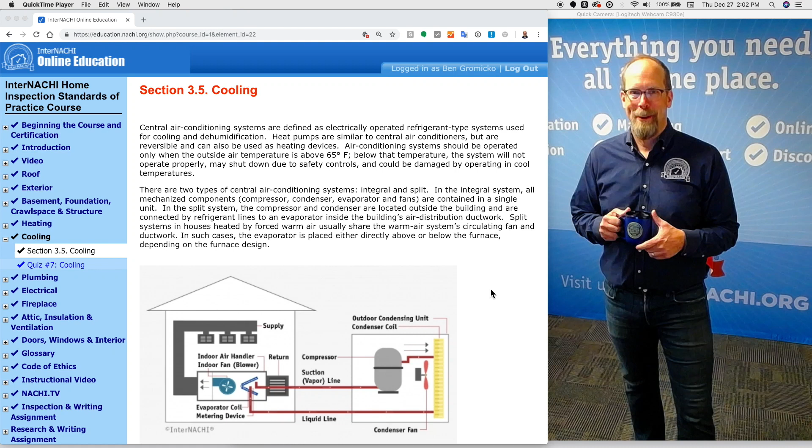We're in the cooling section of the InterNACHI Home Inspection Standards of Practice course. And this video, again, is supplemental to the course. You can play it as you go along your pages within the course.

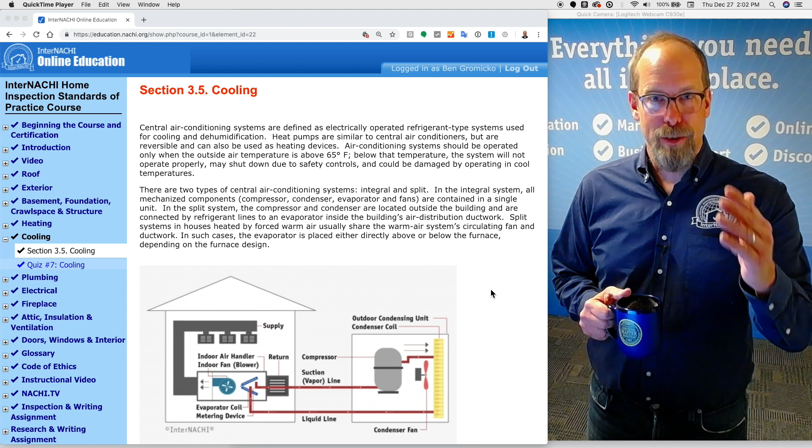Central air conditioning systems are defined as electrically operated refrigerant-type systems used for cooling and dehumidification. Heat pumps are similar to air conditioners, but are reversible and can be used as heating devices.

Air conditioning systems should be operated only when the outside temperature is above 65 degrees Fahrenheit. Below that temperature, the system may not operate properly, may shut down due to safety controls, and could be damaged by operating the unit in cool temperatures.

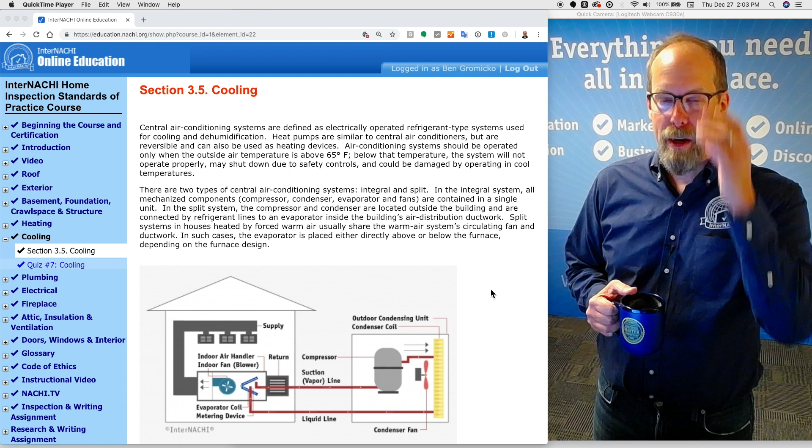There are two types of central air conditioning systems, integral and split. In the integral system, all mechanized components, compressor, condenser, evaporator, and fans, are contained in a single unit.

In the split system, the compressor and condenser are located outside the building and are connected by refrigerant lines to an evaporator coil inside the building's air distribution network, the ductwork.

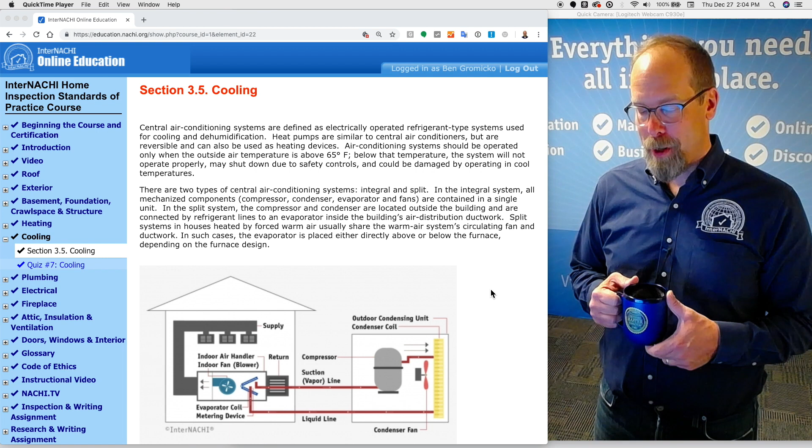Split systems in houses heated by forced warm air usually share the warm air system's circulating fan and ductwork. The heating and cooling share the same ductwork. In such cases, the evaporator is placed either directly above or below the furnace, depending upon the furnace design.

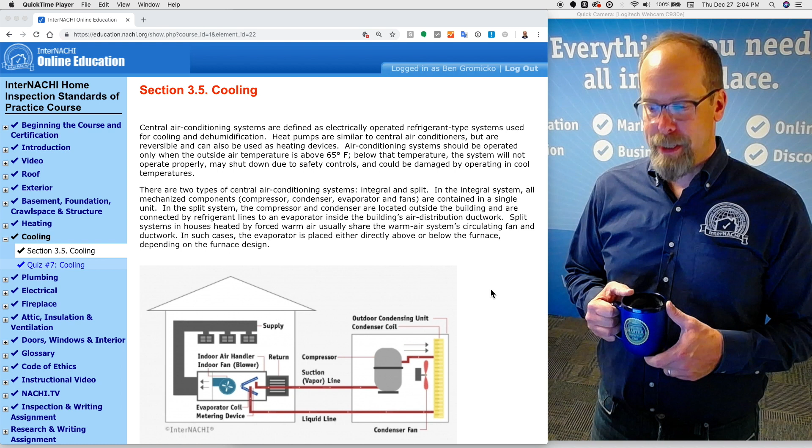Here's an illustration of the liquid refrigerant cycle of a common split air conditioning system, which comes from InterNACHI's online gallery of inspection illustrations. Hundreds of illustrations that members can use to boost their inspection reports and help communicate systems like an air conditioning system.

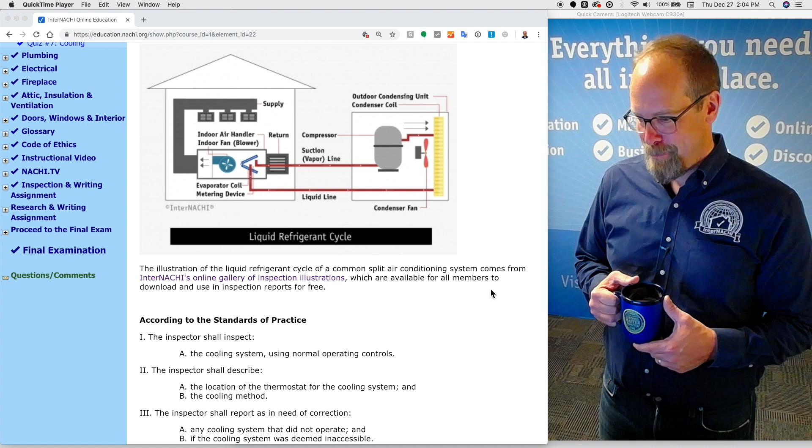According to the standards of practice, the inspector shall inspect the cooling system using normal operating controls, just like the heating system section that we went over before. The inspector shall describe the location of the thermostat for the cooling system and the cooling method.

The inspector shall report as in need of correction any cooling system that did not operate and if the cooling system was deemed inaccessible. As is the case with heating systems, covered in the previous section of the course, cooling systems should be operated using only their normal operating controls.

Most home inspectors perform their visual inspection of the cooling system by inspecting the components located outdoors, such as the condenser cabinet, fins, refrigerant lines, the support of the base, and electrical disconnect.

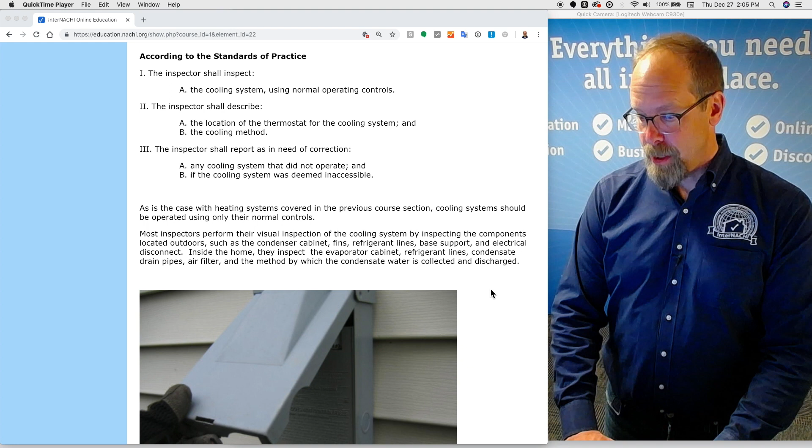Inside the home, a home inspector inspects the evaporator cabinet, refrigerant lines, condensate drain pipes, air filter, and the method by which the condensate water is collected and discharged.

The inspection image here is of an electric disconnect at the air conditioner condenser unit, which is outside the house on a split system. According to the 2018 International Residential Code, Section E4101.5, the disconnect must be located within sight of the air conditioning condensing unit or heat pump.

Interrupting the power supply to the unit by using this disconnect is not required and not recommended. It is not considered a normal operating control. It is considered a service disconnect, and it should not be used during a home inspection.

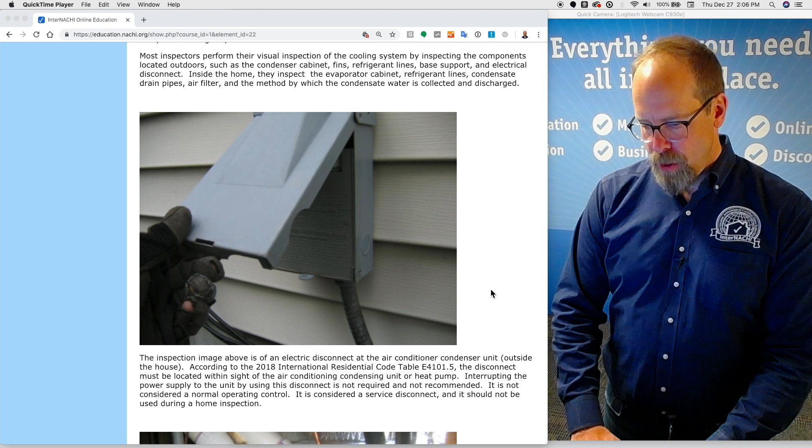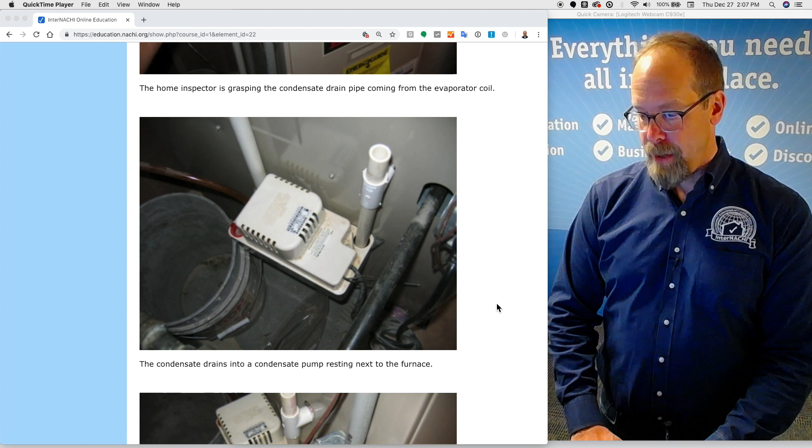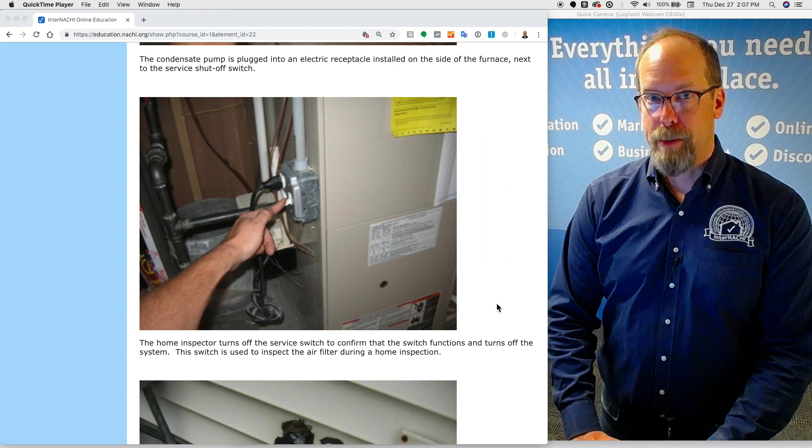In this inspection image, the condensate pump is plugged into an electric receptacle installed on the side of the furnace next to the service shutoff switch. In this inspection image, you can see that the home inspector turns off the switch to confirm that the service switch functions and turns off the system. This switch is used to inspect the air filter during a home inspection. It is a normal operating control.

In this inspection image, the condensate discharge pipe was observed outside and located near the point where the refrigerant lines of the air conditioner unit pass through the vinyl siding.

Cold weather. One issue when inspecting cooling systems is to operate the equipment when the ambient temperature outside is warmer than 65 degrees Fahrenheit. This is a general rule of thumb, or standard recommended practice for a home inspector. The general rule is that if it's cold outside, don't operate the air conditioner. Likewise, if it's hot outside, don't operate the heating system. Care should be taken to use normal operating controls and operating procedures.

Compressors have been reported to be damaged by operation in cold weather or by turning on a system that was shut down purposely. The reason for not operating an air conditioner in cold weather is because of the oil used to lubricate the compressor. In cold weather, the oil may be too thick for the safe functioning of the compressor. Many HVAC technicians and home inspectors won't run a central air conditioner unless daytime temperatures are well above 60, 65 degrees Fahrenheit for at least 2 or 3 days prior to the inspection.

Another reason is that the refrigerant may condense within the compressor. Refrigerant liquid is not compressible. Some new compressors will have a small heating element on the compressor to help prevent this potential problem. Some newer units have low ambient temperature sensors that prevent the compressor from turning on in cold weather, thereby protecting itself. If a home inspector does not operate a unit for any reason, including weather conditions, the home inspector could document that the inspection was restricted.

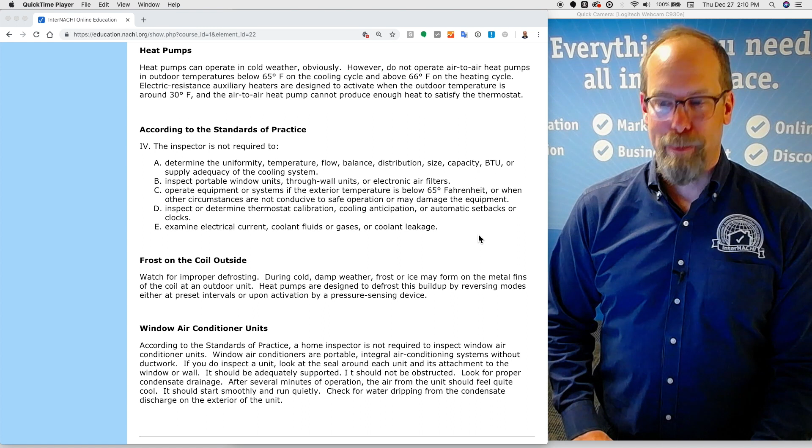According to the standards of practice, there are a few things that you're not required to inspect. The inspector is not required to determine the uniformity, temperature, flow, balance, distribution, size, capacity, BTU, or supply adequacy of the cooling system. The home inspector is not required to inspect portable window units, through-wall units, or electronic air filters. The home inspector is not required to operate equipment or systems if the exterior temperature is below 65 degrees Fahrenheit, or when the circumstances are not conducive to safe operation or may damage the equipment.

The home inspector is not required to inspect or determine thermostat calibration, cooling anticipation, or automatic setbacks and clocks. And the home inspector is not required to examine electrical current, coolant fluids or gases, or coolant leakage.

Frost on the coil outside. Watch for improper defrosting. During cold, damp weather, frost or ice may form on the metal fins of a coil at an outdoor unit. Heat pumps are designed to defrost this buildup by reversing modes either at preset intervals or upon activation of a pressure-sensing device.

Window air conditioner units. According to the standards of practice, a home inspector is not required to inspect window air conditioner units. Window air conditioners are portable, integral air conditioning systems without ductwork. If you do inspect a unit, look at the seal around each unit and its attachment to the window or the wall. It should be adequately supported. It should not be obstructed.